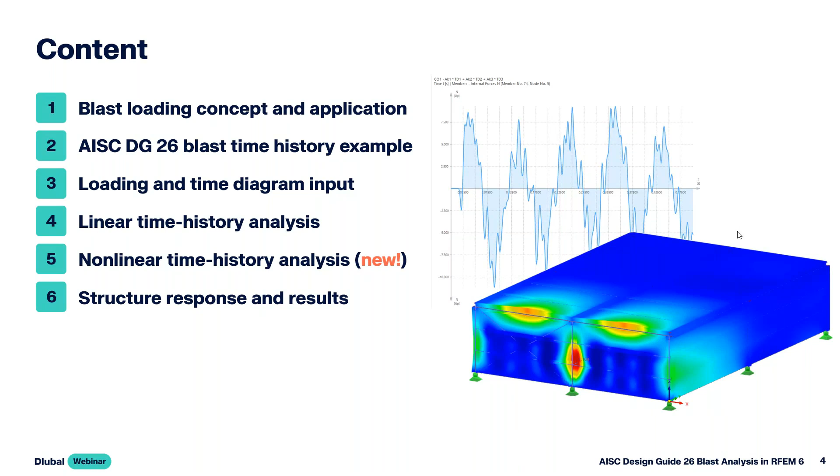So we'll turn now to the blast loading basics. The design resources that we'll be referencing today is, of course, the AISC Design Guide 26, the design of blast-resistant structures. Now, the United Facilities Criteria, UFC document 3-340-02, will also be what we reference today as one of our resources. There are many other references and literature out there for blast analysis, but for our approaches and example today, we'll be utilizing these two.

So let's talk a little bit more about factors that are going to influence the structural damage when we talk about these rare blast loadings. The structure materials, the mass, the stiffness are all certainly going to influence this. But we also want to take a look at the explosive type. How close is the distance to the structure? Obviously, if the explosion is closer, we're going to see more localized and global structural damage than if the explosion is further away. The building geometry will also play an influence.

And then the blast orientation to the structure. So elements facing the blast will see higher loads and more damage than what we see of the elements that are parallel to the blast. And finally, the surrounding structures or adjacent elements - these can also affect blast patterns. We could see load amplification or load reduction.

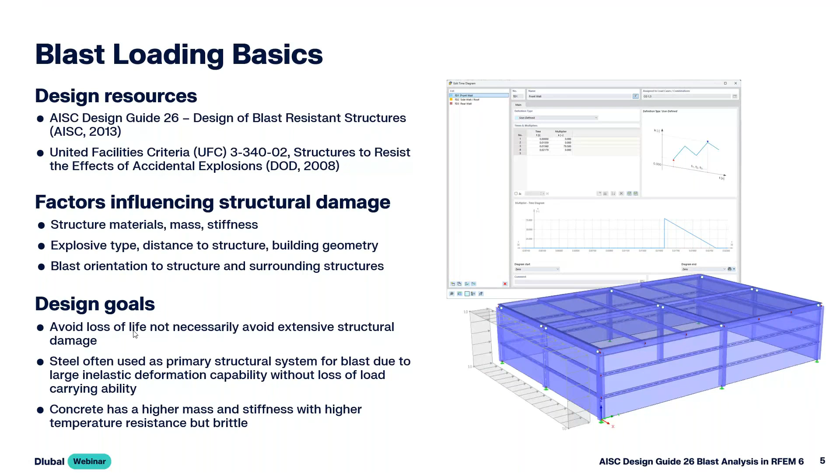So turning now to Design Guide 26 to talk about the blast load application and this idealized pressure time history for blast load.

We start off with the peak overpressure. This is the pressure above the ambient atmospheric pressure, hence the name overpressure, and it's an instantaneous pressure arriving at the structure. We have this blast load taking place at time equals 0. It takes some time for the blast wave to reach the structure, so we have our time of arrival, and then we see this instantaneous rise in pressure on the structure itself.

We then have the positive phase duration, which is the time for the pressure to return back to that ambient pressure. We also have in the positive phase duration what we call the positive impulse, the total pressure time energy applied during the positive duration, and this is simply the area under the curve.

Now, in addition to the positive phase, we also have this negative phase duration. This is the energy, the impulse, again that area under the curve that follows the positive phase, where pressure actually falls below the atmospheric pressure.

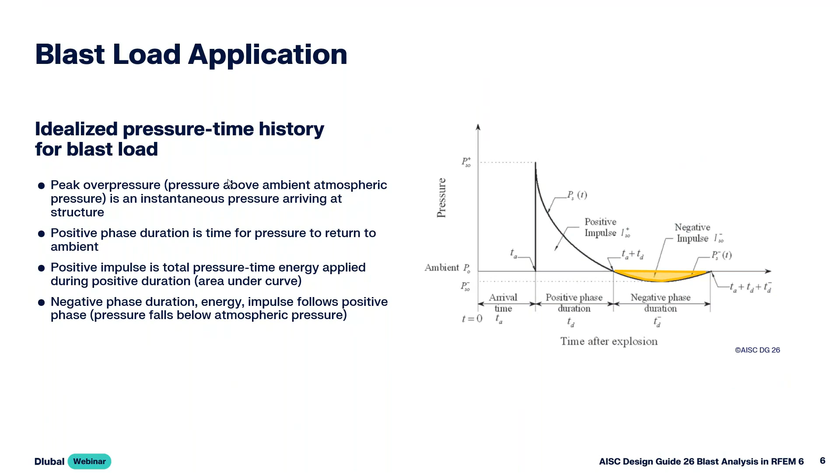We start first with the free field blast load, also known as the side-on blast load, where this blast travels parallel to a surface. It more or less sweeps over this surface with no impeding objects, so we might be talking about sidewalls, a roof, a rear wall - certainly not the surfaces oriented directly to the blast. We often see the subscript SO, for side-on, used throughout literature to represent this particular loading.

Then we have the reflected blast load, where the blast load strikes an angled surface other than parallel. We certainly might see this for a wall oriented directly normal to the face of the blast load itself. You'll notice that we have a reflected pressure, P sub R, that's significantly greater than our side-on, and this makes sense because it's closer to the blast and oriented normal to the face of it.

We calculate P sub R with the equation shown here: we take the side-on pressure, the incident pressure, and multiply by what we call the reflection coefficient, C sub R.

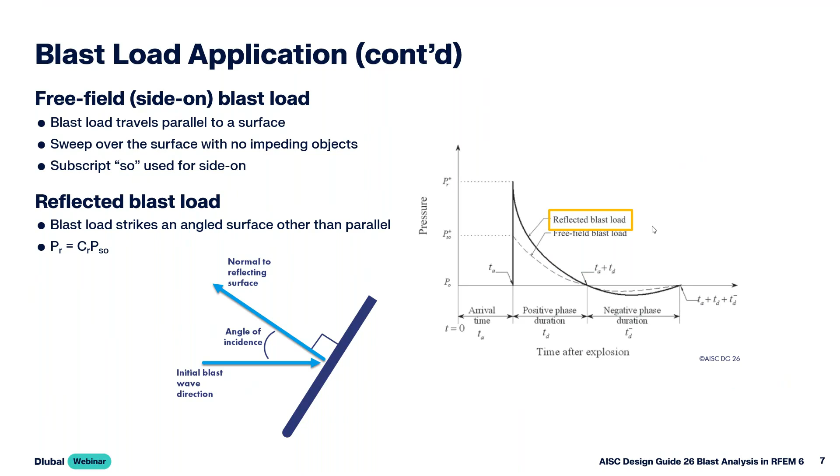Now we may be wondering, what is the angle of incidence along the x-axis? We'll refer to this small diagram on the left-hand side, where we have our initial blast wave direction, and this travels to our target element - this might be a wall element, for example. We're going to see this load reflecting normal to the face of the surface, hence why we see this 90 degrees here. The angle of incidence is then measured as this initial blast wave in comparison to this reflecting load, and this is ultimately what we use with figure 2-193.

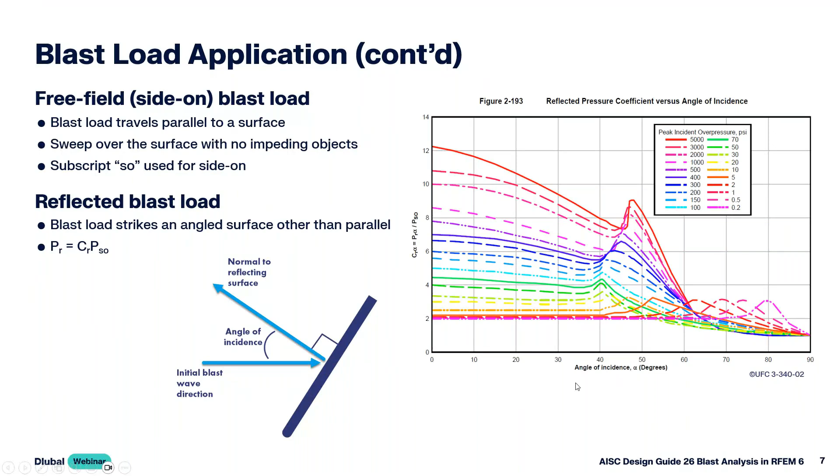Well, the equation that we use for this duration is equal to 2I over P.

Moving on to the pressure time history for the negative phase, we're actually going to neglect this for this demonstration. So a little bit simpler approach here, but we certainly don't want to always neglect this. For example, when we have elements that are weaker in the reverse loading direction, or if we have a structure with very short natural periods compared to the load duration, then we certainly don't want to neglect this negative phase. But again, for example purposes today, we will go ahead and not take this into account.

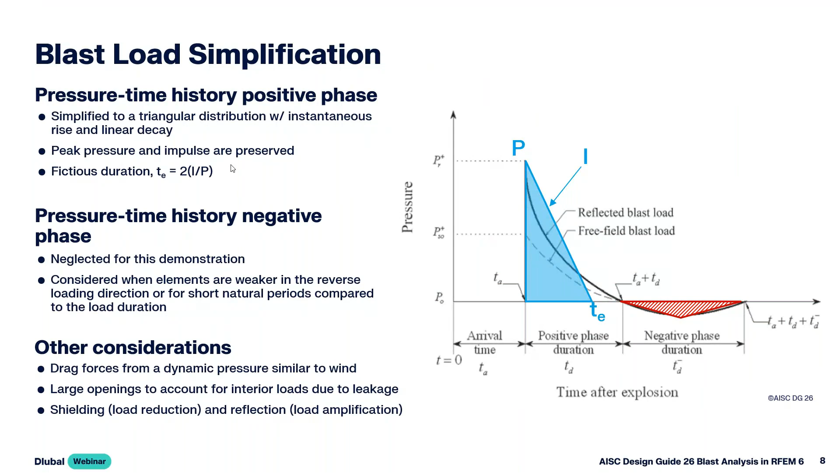So we're now going to turn to RFEM 6, and we want to begin our example today. And for those of you joining us that are not familiar with our program setup, I'll do a quick explanation here that RFEM 6 is our base program. This allows us to fully model the structure, we can load it, and we can run a full static analysis.

The response spectrum analysis will generate seismic loads according to standards like the ASCE 7, the NBC. We have the pushover analysis add-on, which is an advanced seismic analysis taking into account the structure's nonlinearities. Now, we won't be touching on either of these more seismic focused add-ons for today.

But finally, we do have the time history analysis, and this will certainly be a big part of our example once we do get into RFEM, where we can apply these forces to the structure and we can tell them how they should vary in magnitude over a set time period.

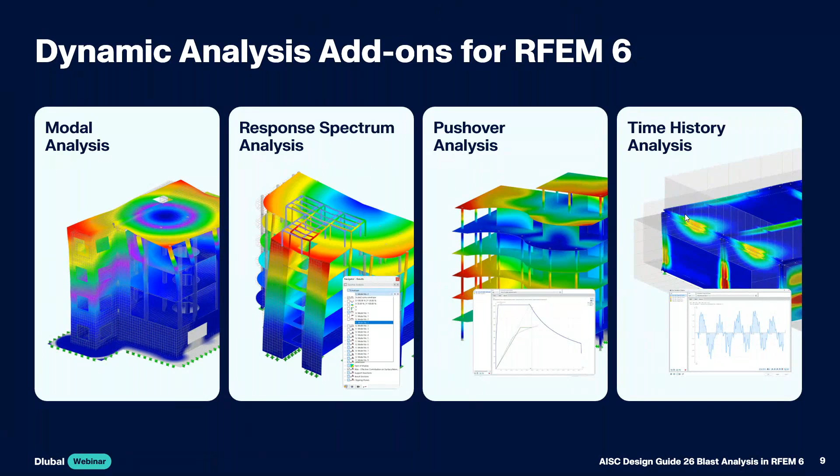Now, in the short direction, we have braced frames, and in the long direction, we have rigid or moment frames. All of the cross sections used should be hot rolled cross sections. And then for our roof deck and our wall panel, we will set these as ribbed metal decking.

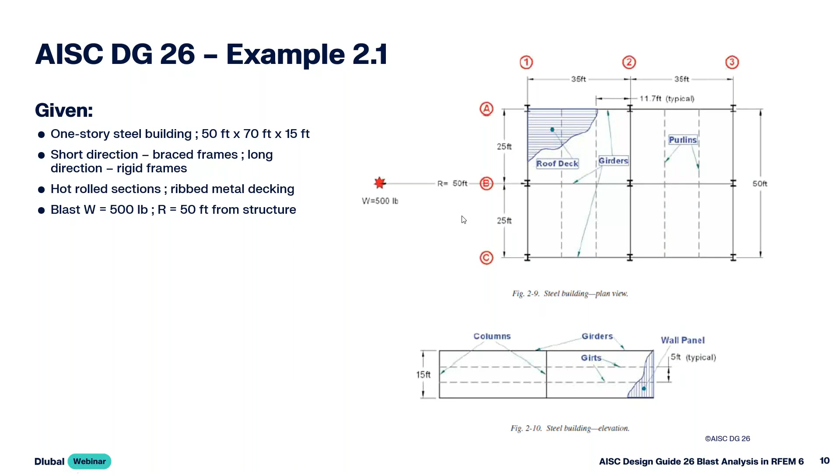Now we want to move on to our solution, and the solution is generating or calculating these time diagrams that we will eventually input into RFEM itself. And we begin with the scale distance Z. So in Design Guide 26, this states it's a simple equation here of our charge distance over the cubed root of the charge weight. We know this is 50 feet for the distance, 500 pounds for the charge weight, and we get a value of 6.3.

So we're going to now refer back to the UFC 3-340, and in particular, figure 2-15, because we need to determine all of these variables from the idealized pressure curve. And this is actually done so directly within this figure itself. Now, before we get into the actual values, there are some assumptions made with this particular plot. For example, this is assuming a hemispherical explosion, that this explosion is taking place at ground level. If you have an explosion that takes place up in the air, a spherical explosion, there are different plots that you should reference.

This also assumes that our structure is at sea level. If we have any other altitude, there are some scaling approaches we could take directly from the UFC. And finally, this plot does assume a fully reflected surface. So if we had any angle, remember a couple slides back, we'd want to refer to that reflection coefficient, angle of incidence, to maybe scale our pressures and variables accordingly.

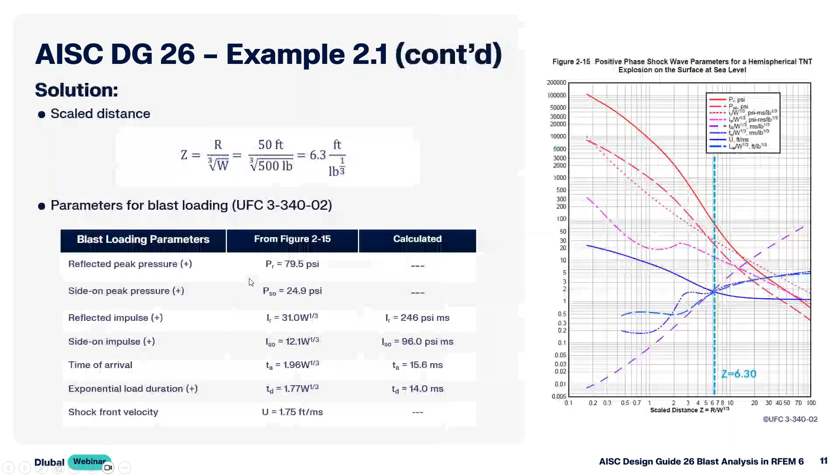So if you remember a couple slides back, we don't know what this equivalent duration is, but we have a pretty simple formula for this, and we just simply input the impulse and the pressure. This information was given to us directly in figure 2-15 that we determined here on the previous slide. So we take these values, input them in, and now we get a time duration of 6.19 milliseconds.

So we'll now move on to the side-on pressure. This is going to be the time diagram for the sidewalls and the roof. Now, for simplicity and also a little bit more of a conservative approach, I am going to use the same scale distance Z at the front wall center line as what I'm using for the sidewalls and roof. Technically, the pressures might decrease as we move along the length of these sidewalls and roof, but again, a little bit more conservative approach here.

So we have a similar triangular shape shown over on the right-hand side, but we would fully expect our pressures to be significantly lower. Our impulses will be lower as well. Again, we don't know this time duration. Well, we know P sub O and I sub O from the previous slide, figure 2-15. We input them into this equation and we are calculating here our time duration of 7.71 milliseconds.

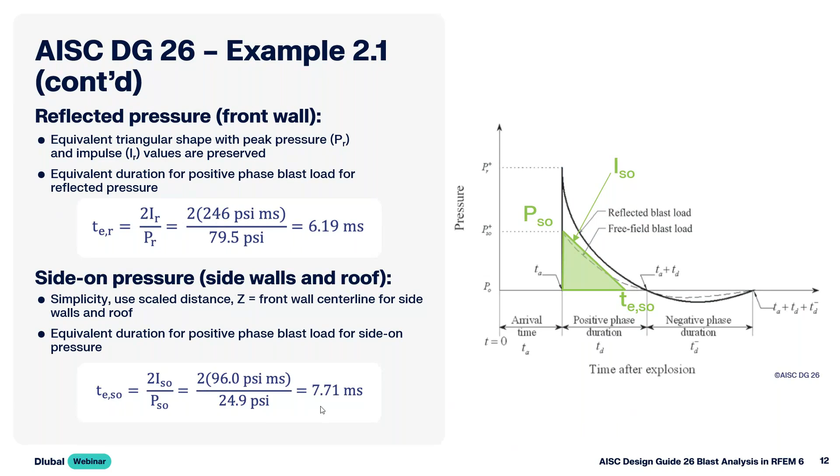And now finally, we turn to the rear wall. For this one, we do want to modify our charge distance. This rear wall will take into consideration the distance from the blast to the front face of the structure, which is 50 feet. But then we also have the length of the structure of 70 feet, so our new distance will add these two together to get 120 feet.

Modifying also our scale distance with the equation R over the cube root of W, we're going to input in the 120 feet. We still have 500 pounds, and we get a value of 15.1. So we're going to use the same UFC figure 2-15 here. We're going to plot our Z value, and we're going to get the various parameters now for our rear wall presented within this table. Again, the positive phase duration.

But you'll notice that I did not list any of the reflected pressures or the reflected impulses. That's because this back wall is not exposed normal to the face of the explosion itself, unlike something like the front wall. So therefore, we're more interested in those lower pressures, like the side-on peak pressure here and also side-on impulse. Now, again, for that triangular distribution, we don't know our time duration. We input in this information here, and we get a value of 19.1 milliseconds.

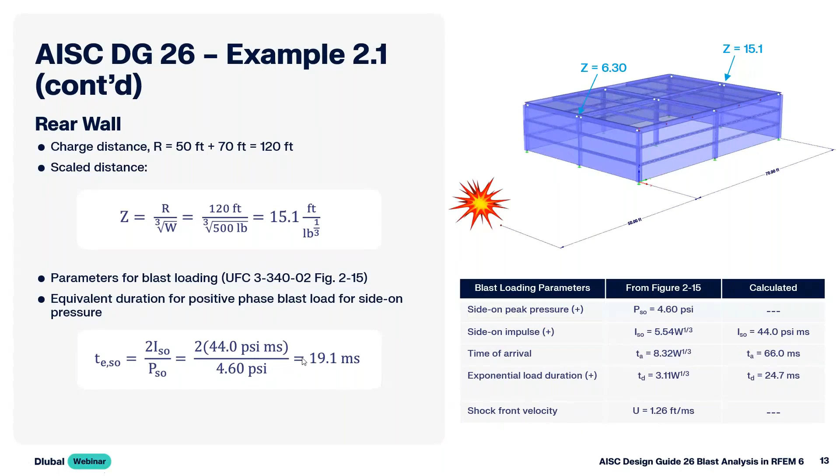Now, the rear wall is a little bit unique too, in the fact that we aren't going to have this instantaneous rise in pressure, like what we saw with the front wall or even the sidewalls and the roof. It's going to take some time for the pressure to linearly increase to the value of the peak pressure, and then we linearly decrease. So we know the time of arrival, that's equal to 66 milliseconds.

And that was just given directly from figure 2-15, as you see here on the previous slide.

We are now looking to solve for T sub 2, the time to peak pressure. We account for this given in Design Guide 26 by taking the time of arrival and adding L1 over U, where L1 is the span of the element parallel to the traveling wave—in our case, the building height of 15 feet. U is the shock front velocity, given directly in figure 2-15. We input these values and get a time duration of 77.9 milliseconds.

So now we know T sub A and T sub 2. The final time we need to determine is T sub F. This is a simple equation: we take T sub 2 solved for above and add the equivalent duration solved for on the previous slide, taking into consideration the impulse and pressure. We take 19.1 milliseconds, add it to 77.9, and get our final time point of 97 milliseconds.

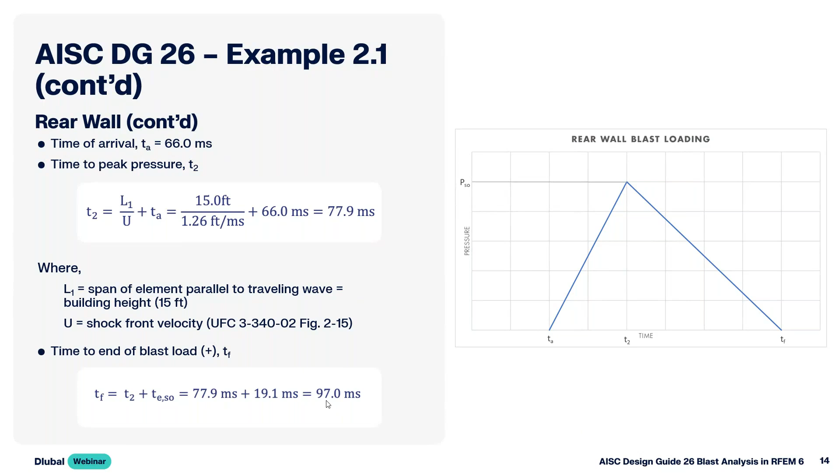Let's summarize a few assumptions for this analysis. Remember, we're using this equivalent triangular loading function, much simplified. There are more exact loading functions out there—for example, the Friedlander equation, if we wanted to more accurately represent the blast wave shape. Also, the negative phase of the shock was neglected for this example, along with other variables we listed: dynamic pressures with drag forces, large openings—these are not included in this example.

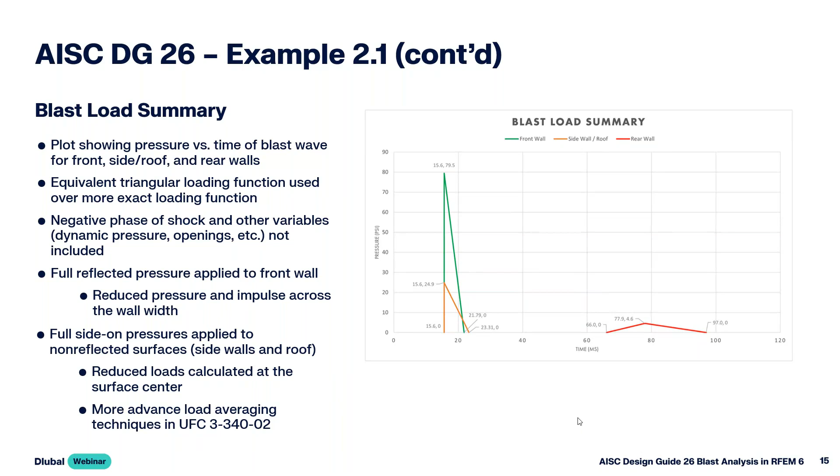Okay, so we are going to turn now to RFEM directly. I'll go ahead and launch the program here. For the sake of time, I have already modeled our structure from the Design Guide example given, so we'll do a quick model review.

There were some assumptions made, for example with the cross sections. We have W14 by 193 defined for our columns, A992 material. Our girders are defined as 18 by 130. We have our purlins here, channel sections, 10 by 25, A36 material, and our girts, which are 10 by 30, also A36.

Now, because we have braced frames in our short direction, I added in some X bracing. These are just going to be round circular sections, such as a rod, for example. But you'll notice that the member type here is unique.

All the rest of our members in this example are set to a standard beam, a standard column. But for my X braces, I have set this to a tension-only member. This means it should only take tension forces. If compression is introduced into this member, it is deactivated within the static analysis, and if tension is reintroduced, it will be reactivated due to the nonlinear capabilities within RFEM. So just something to keep in mind there.

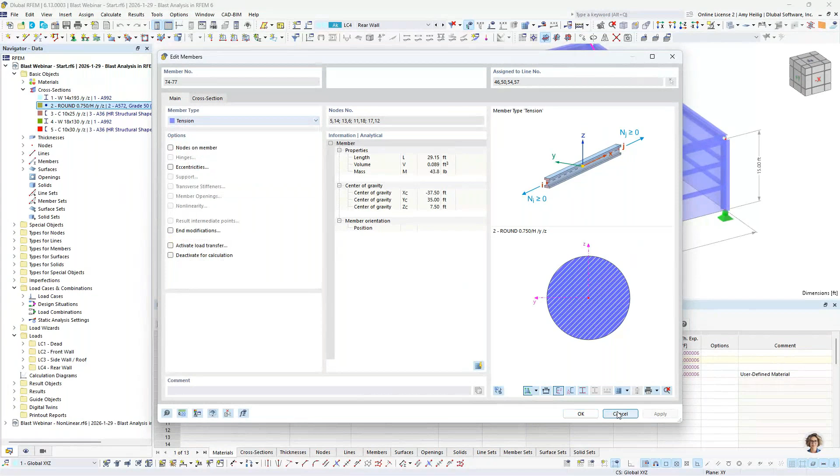Now, as far as our surfaces, all the surfaces are defined here. So we'll take a quick look at the front surface, for example. All have the material A653 applied to them and a set thickness. Now, this thickness is a bit unique as well. So if we take a look at the thickness type, normally we would set this to a uniform thickness, which is just any type of standard surface.

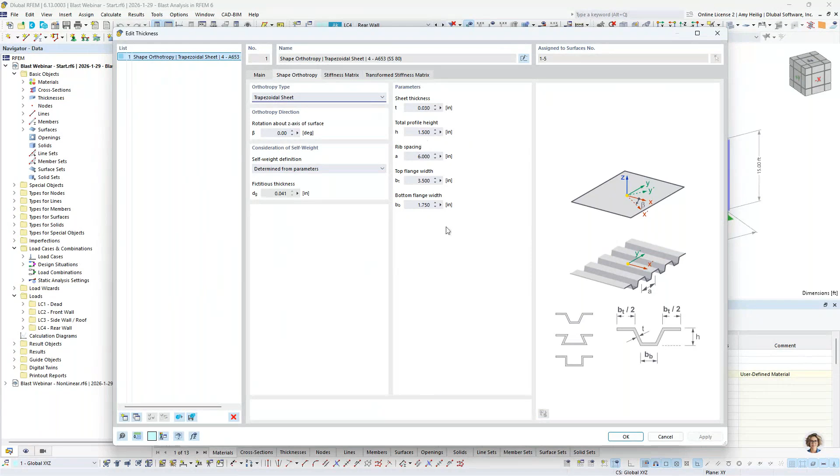But I did set this to an orthotropic stiffness instead. And with this orthotropic entry, we now get this second tab here where I can directly select something like a trapezoidal sheet, and I can input the sheet thickness, some geometric properties like the total profile height, the rib spacing, and so on. The program is going to take all of this information and directly calculate the stiffness matrix based on these orthotropic stiffness properties. So this is all done automatically, and you have a nice view here of the stiffness matrix directly.

Okay, so the final thing just to note is, of course, the dimensions. We talked about 50 feet in the short direction, 70 feet in the long direction, 15 feet in height. And our blast analysis is going to be taking place about 50 feet away from the front face of this wall here. Now, we also want to cover our loading.

So I will launch our load cases and combinations dialog box. And under the base data, I have set here the ASCE 7, the latest 2022 standard. Now, this really doesn't play too much of an impact in our example today because I'm not generating my load combinations automatically. You can see this is turned off here.

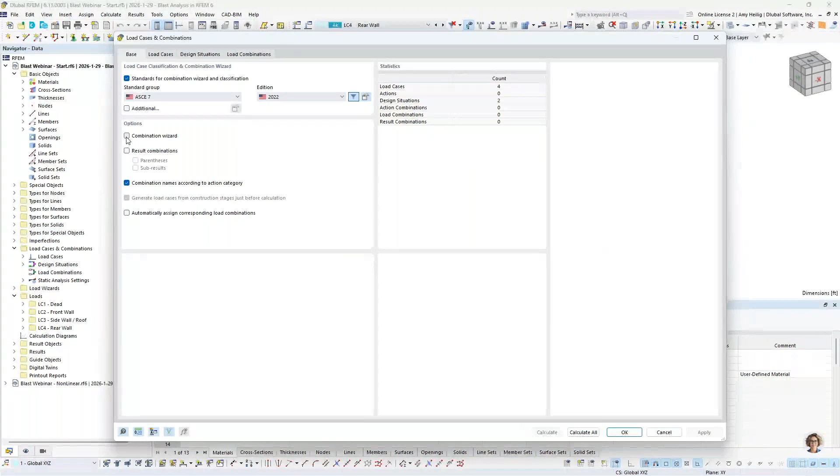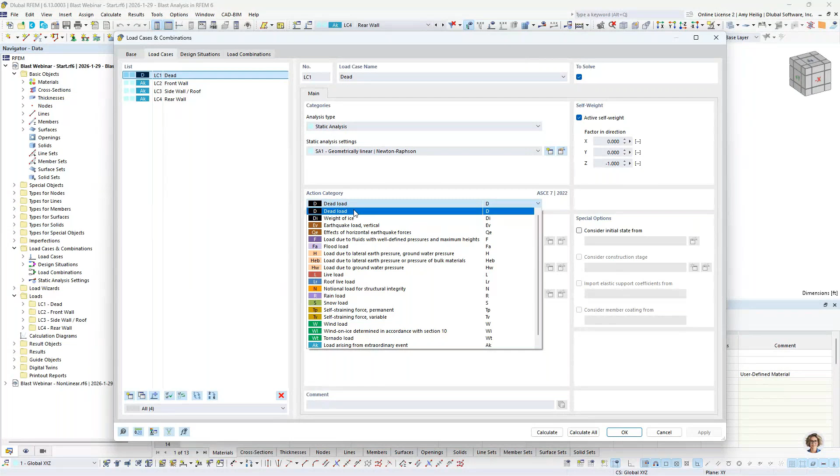Now, under the second tab, these are the various load cases that I've defined. And we start first with our dead load case. So we have self-weight activated within this load case, and I did assign the action category here based on the ASCE 7 to dead load. Now, again, this isn't so important. If we were combining into the load combinations automatically, the program would need to know this in order to know what load factors are defined. But just for a nice categorization, we'll go ahead and apply this to the correct action category.

I have 3 additional load cases here, including the front wall and the sidewall and roof, as well as the rear wall. So this is going to represent these loads from the blast being applied to the structure. The action category here is set to the load arising from extraordinary event.

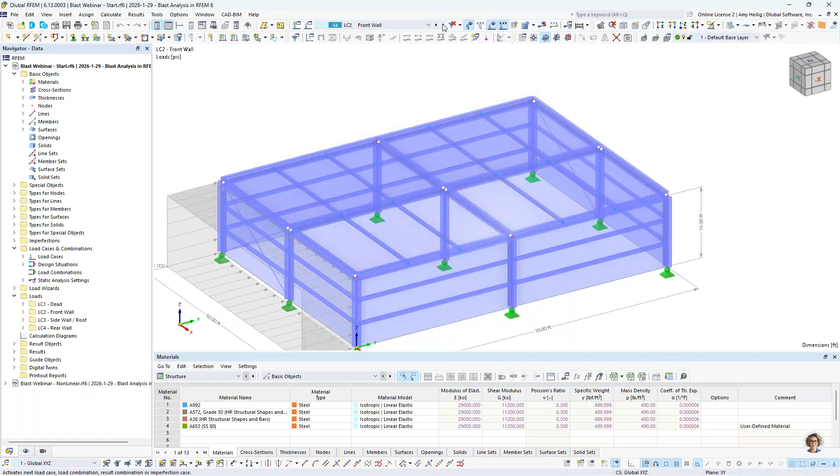So now that we have our load cases defined, we need to actually apply the loads to the structure. And we begin with first our dead load. So remember, self-weight is considered here, but also I have applied an additional member load to my main girders up at the top of 0.1 kips per foot, just to account for any additional dead load within the structure. I then have that first load case here for my front wall. So you can see that this is a uniform load applied to this front face of this surface.

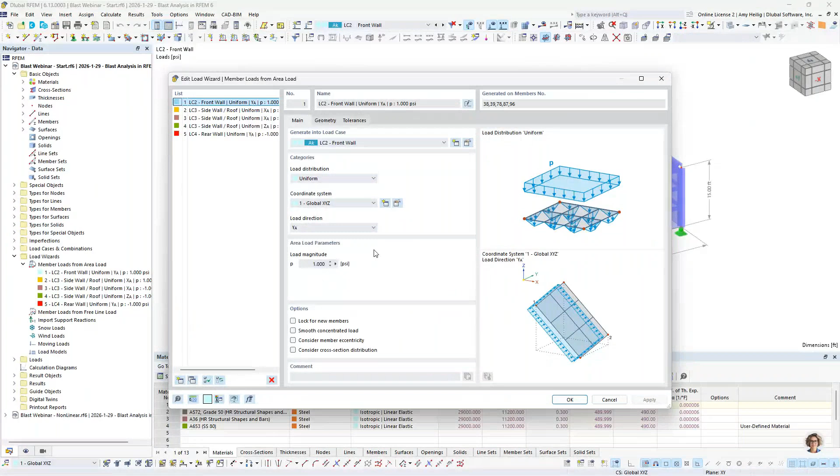Now, this load is a bit special in the sense that I did take advantage here of our load wizards over in the navigator, where I can apply these as member loads by specifying an area load. So if I double click on this load, we go into the load wizard dialog box. I have applied the load in the global Y direction towards that front face of the structure, and I gave it a load magnitude of 1 psi. This is just a simple unit load. So we're going to later on define the time diagram where this load is going to vary in magnitude. So we don't want to do it here with this applied load. This is why it's just a simple 1 psi.

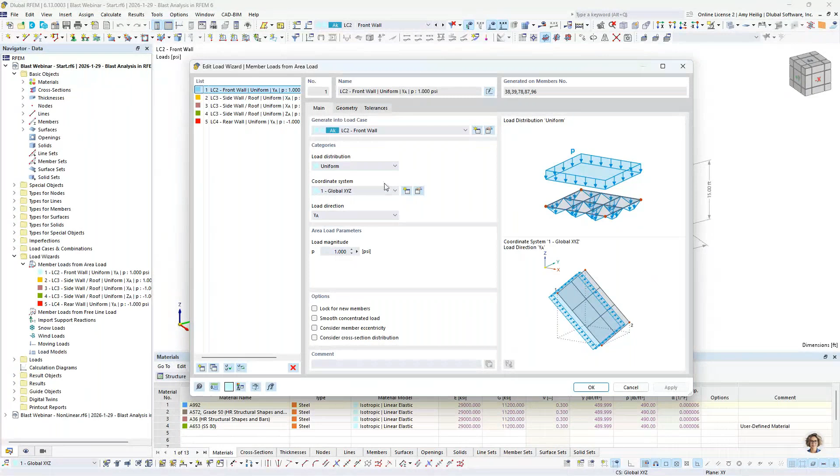Now, if any of your units are incorrect, you can always access down here the units and decimal places and make adjustments to that. So we also have the ability here to select the 4 points for this area load, and we can also neglect members. For example, I didn't want to consider the load being applied to my girts.

So once this is done, you'll see we get a nice view here of the tributary area of the members that this load will be applied to. We can take this a step further by right-clicking and displaying separately to see the load actually applied to the structure itself and the particular members that I have selected.

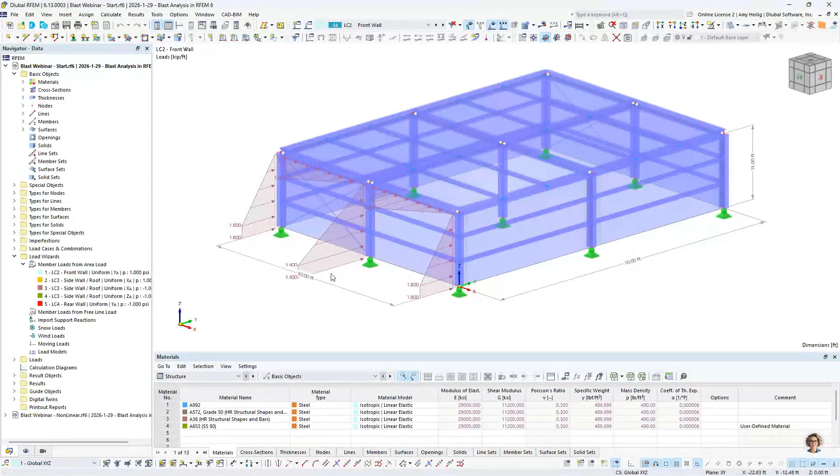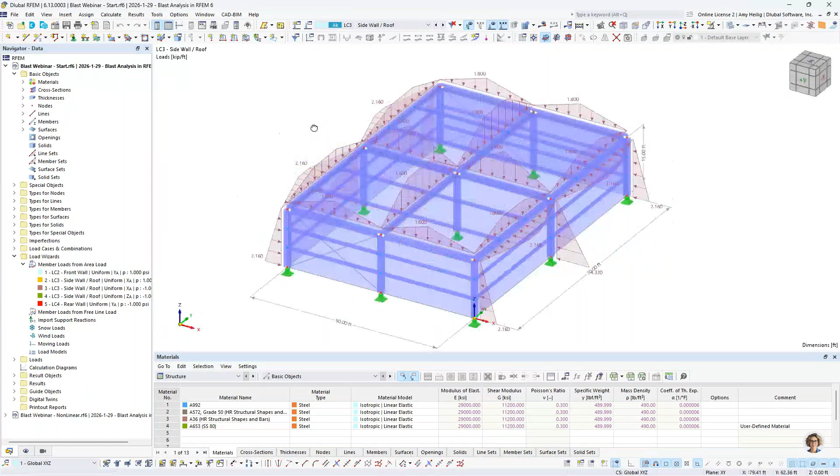So we can right-click to turn this back to a uniform load display, and take a look at our second load case for the blast load. Very similar concept here, but this time it's applied as the sidewalls and the roof. We can right-click to display separately, and again we see those loads distributed to the main members, neglecting the girts and the purlins. Finally, we have our last load case for our rear wall, so same concept there.

So now that we have these loads defined on the structure, we're ready to move forward with our dynamic analysis. For this, we need to activate our base data dialog box. This can be found by right-clicking on the model name here in our navigator, or it can be accessed through our quick tools up here in the top.

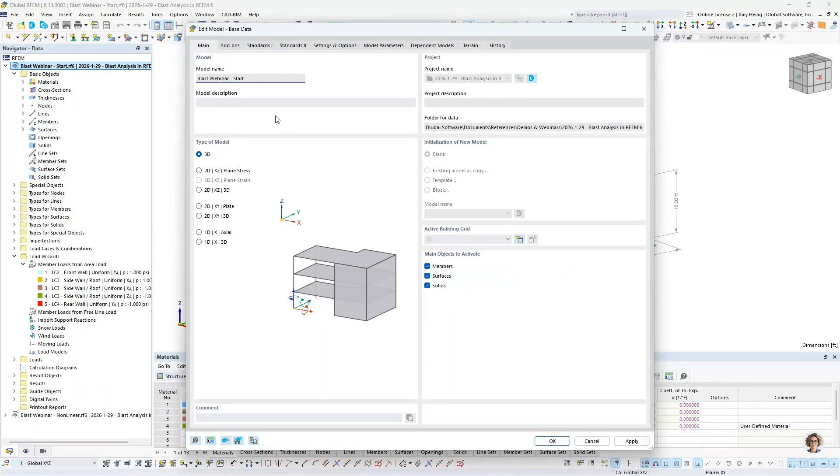This is essentially the dialog box that will pop up when we create a new RFEM model. Under this second tab, these are the various add-ons that we can activate within our RFEM model itself. For today, I am going to move forward with both the modal analysis and the time history analysis.

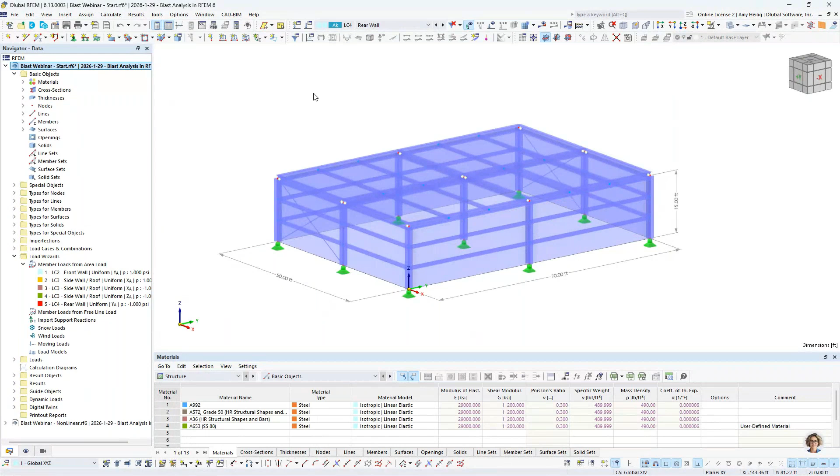So when we activate those add-ons and come back into RFEM, you can see it really doesn't look too much different. So what we want to do is go into the load cases and combinations dialog box, and I'm going to create a new load case here. This is going to be for my modal analysis.

Now the analysis type here is going to be toggled down to modal analysis. This is available to me because I've activated that particular add-on. We then want to adjust the modal analysis settings. For this, I'm going to calculate a total of 40 eigenmodes. I want to make sure that I get enough mass participation, that I understand what's going on with our structure. We'll go ahead and leave this as the Lanczos solver.

I'm going to modify the mass matrix to diagonal. Now, remember that this blast load is traveling from the front of our structure to the rear in the global Y axis. We can't see that because of this dialog box, but that's what's happening for the overall analysis. So just for a quick calculation, to really hone in on what's going on in the Y translation direction only, I'm going to deactivate the additional degrees of freedom here for my mass matrix.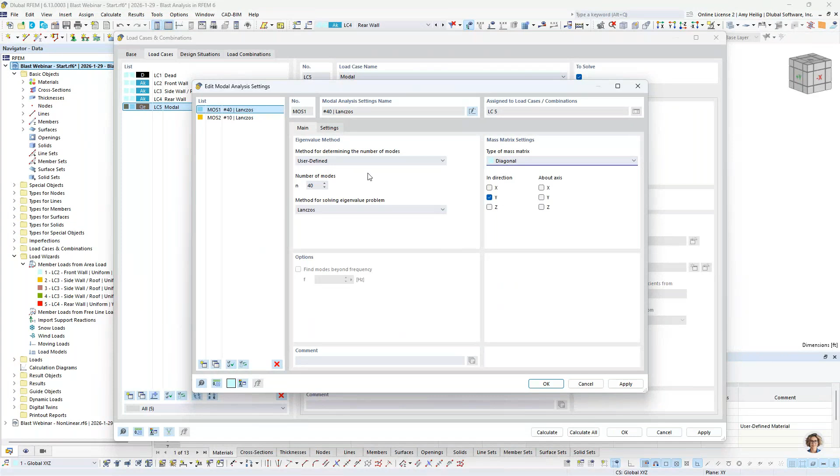Now, for any further information on the different mass matrix types or solver types, you can always click on this info button in the lower left-hand corner of these dialog boxes. This will take you directly to our online manual and this particular dialog box to explain these options further. Now, the additional settings here can all be left as default, so I can click OK.

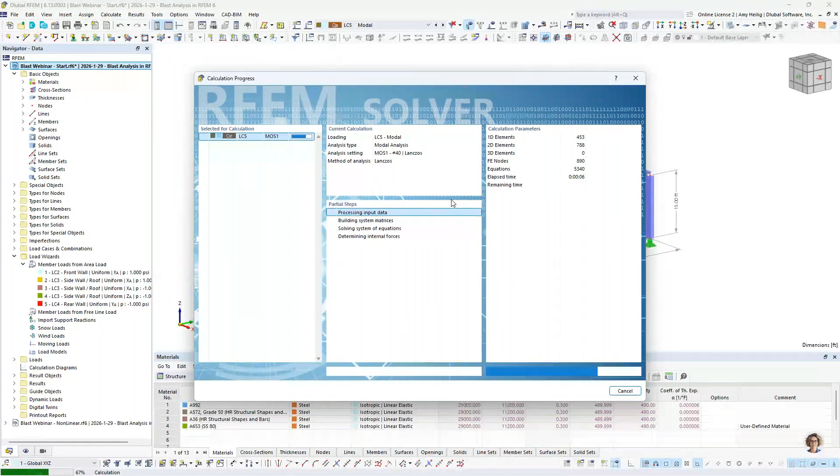We are going to import in the masses from our dead load case. We also have the ability, if we wanted to create a mass combination, we could do so. Essentially we'll get a pretty quick analysis here. Again, the program is going to determine those 40 different eigenmodes, and we are presented with our analysis results.

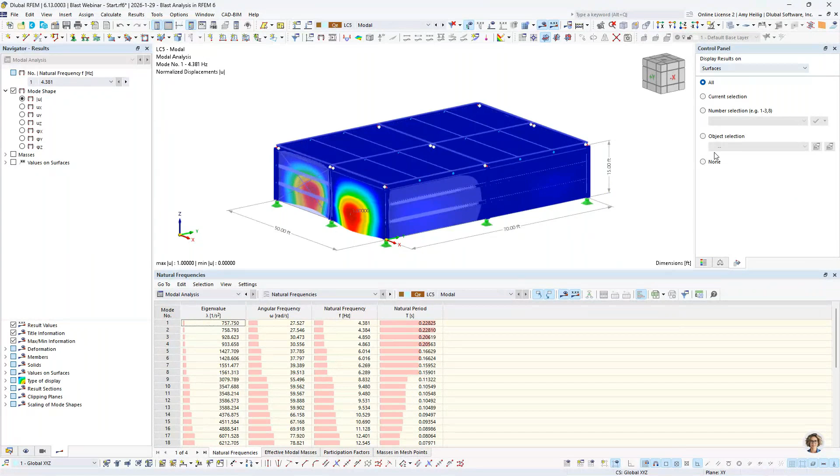So you see here that we have our modal analysis results presented to us in table format, and we now have a new tab over here in our navigator with the results shown as well. Because these loads are being applied to the members themselves, I'm not so interested in what's going on here with the surfaces. So I can always deactivate the surfaces from the display of my results by toggling this to none, and take a look at the members themselves, in particular the second tab within the table.

We want to determine here what are our dominant mode shapes. Remember, we're only looking in the Y direction. As I scroll down through this table, I see mode number 9. This certainly has the most mass participation, so this will be one of our dominant modes. I want to note here that the natural frequency is updated over on the left. So we'd want to write this number down, 8.832 hertz, because we're going to utilize this later on for damping purposes.

And then we continue scrolling down to maybe find our second dominant mode, and that's going to be mode shape number 27, with a frequency of 15.963. So we'll go ahead and write that one down as well.

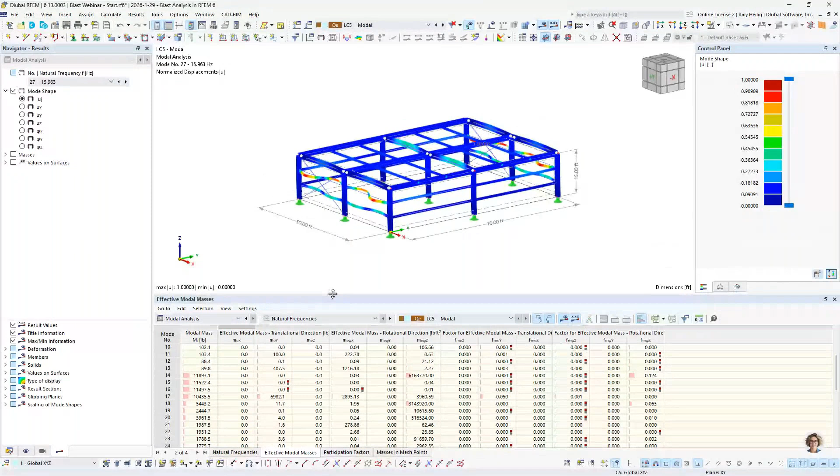So now that we have this information, it will make a little bit more sense as we move forward. You can also view under the first tab if you're interested in mode shape number 9, where we can see the angular frequency, natural frequency, and natural period. We're probably also interested in mode shape number 27. Keep those natural frequencies in mind, we'll return to them when inputting the damping for the time history analysis.

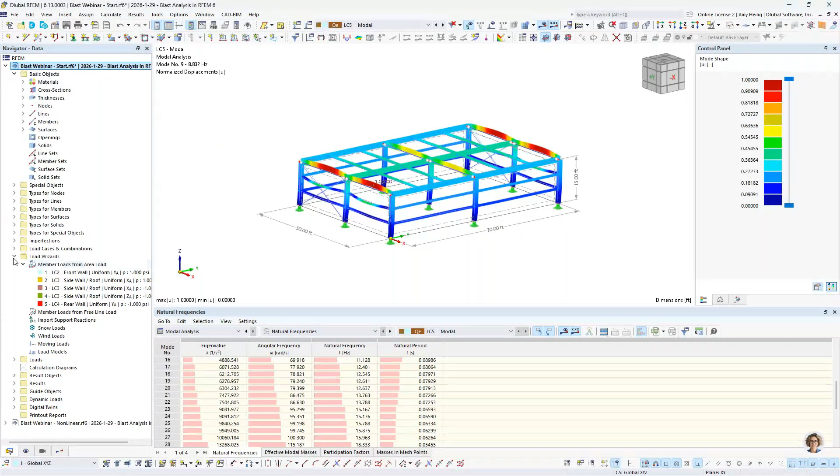Now that we have completed a quick modal analysis, let's move on to the time history. In our navigator on the left, there's a new folder called Dynamic Loads, because I've activated the time history analysis add-on where I can directly define my time diagram. So I double click to create my first definition here.

Within my time diagram, this is where we begin inputting the information we determined from those slides and from Design Guide 26. We'll start by giving this a new name, and we'll call this one Front Wall. As far as our time diagram input, we have two options: we can set this to user defined, where we input table values directly, and that's what we'll be using today.

Alternatively, if you had a function, like the Friedlander equation to represent that idealized pressure curve in more detail, you can input that function directly in RFEM as well. For our front wall, taking advantage of the user defined option, let's go back to the PowerPoint because I want to focus on this time diagram for the front wall only.

If you remember, we have already determined all of these points from our previous calculations. We have our instantaneous rise in pressure to 79.5 psi, and then this linear decay back to 0. We have already determined the time values at each of these points, and these are the points we'll directly input into RFEM for our first time diagram.

So we go back to the program, and our first point is going to be at time 0 with a multiplier of 0. Remember, we're going to apply this time diagram to that unit load back in that particular load case I showed you earlier, to tell the program how to vary the load magnitude over a set time. Our second point is going to be...

0.01559, with the multiplier still set to 0. But now, under the third input option, we type in a time of 0.0156 with a multiplier of 79.5. Finally, our fourth point will be 0.02179 with a value of 0.

You can see that our time diagram shown here in RFEM exactly replicates what we just saw in the PowerPoint example. Now you'll notice I don't have the ability to set the same time for step 2 and step 3 to 0.0156 — the program will give you an error. So I had to offset this instantaneous rise in pressure just slightly with the multiplier of 0.

It's the exact same shape as our front wall, with this instantaneous rise in pressure, but the peak pressure here is significantly lower because it's not oriented directly towards the blast itself. Then we have a linear decay back to 0, and we know all of these times as we've solved for them. This is the information we want to put directly into RFEM for our second time diagram. The first 3 time inputs are actually all the same, but we do want to modify our multiplier, which is going to be the peak side-on pressure, to 24.9 psi.

And then our linear decay back to 0 is also slightly adjusted from our front wall, and this will be 0.02331. So with the program plotting these various points, we now see our time diagram that reflects our PowerPoint slide that we were just taking a look at. So we then have our final time diagram.

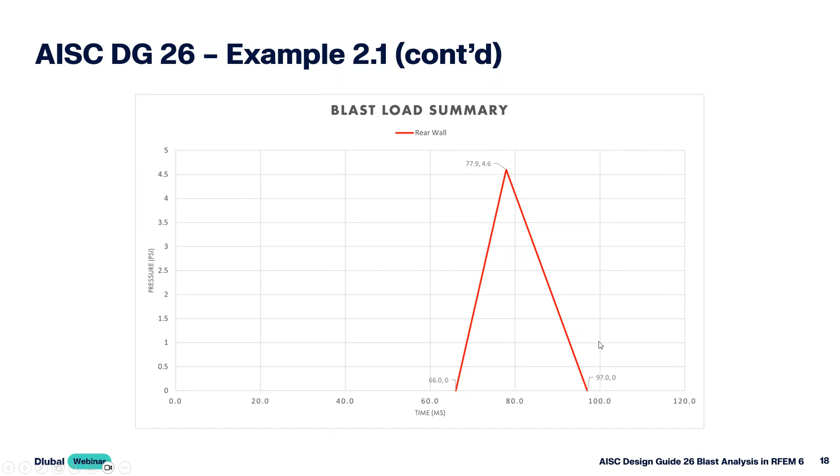For this one, I'm going to create a new definition here, and this will be for the rear wall. We'll go back to our PowerPoint one final time to look at the time diagram we've determined for the rear wall. Now remember, this one looks a little different because it does take some time for that blast wave to reach the structure, but we have a linear rise to that peak pressure, and then it decays linearly back to 0. We know all of these points, so this is directly what we will input for our third time diagram.

The time 0 with a multiplier of 0, and then our second point will be 0.066, with a multiplier of 0 as well. Our third point will be 0.0779, with a multiplier of 4.6. And our final point is going to be 0.097, with a multiplier of 0. So we see that relevant time diagram shown here that replicates what we just saw in the PowerPoint.

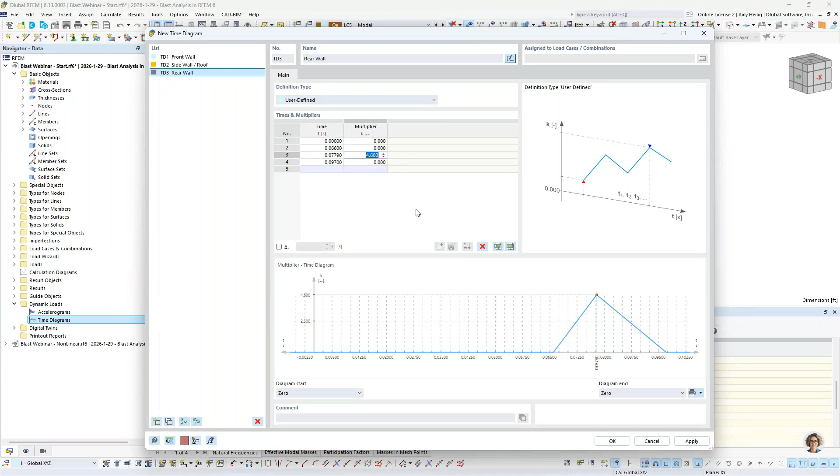Now that we've created these time diagrams, we need to correlate them with the unit loads that we applied to our structure under the load cases. We'll click OK through this dialog box and go into our load cases and combinations. I could run a time history analysis for these individual load cases, as you see in this dropdown, but that's not the intent of this example. The structure isn't going to experience the front wall blast initially, then the side wall and roof separately from the front wall and rear wall. All of this is happening at one time, but the magnitudes vary over that duration.

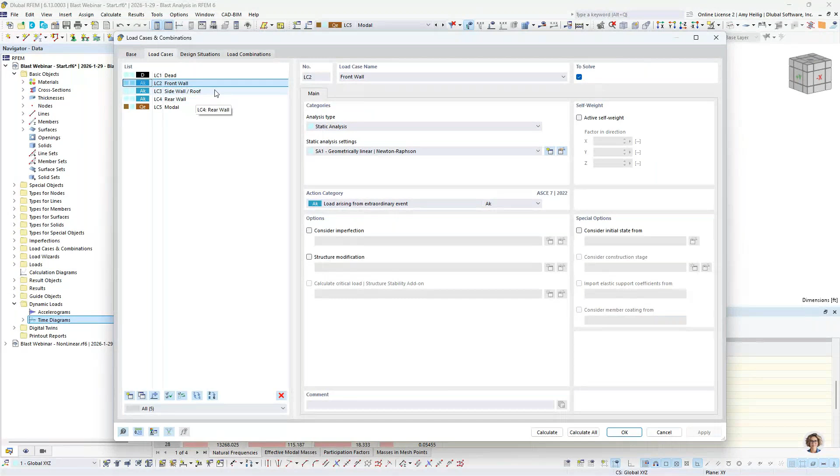The only way to combine all of these into a single time history analysis is under our load combinations tab. So we create a new load combination definition, and the analysis type is set to time diagram. Now we have our time history analysis settings to go through in more detail. Within the dropdown, we have two linear solvers, including the linear modal, which is a decoupled system based on the model's eigenvalues and mode shapes.

A modal analysis with this solver is incredibly important—we want to make sure we have an accurate modal analysis. For our example today, we're going to use the linear implicit Newmark solver instead, which is a direct time integration method. It requires sufficiently small time steps, but a big difference is that we don't need that modal analysis whatsoever. The modal analysis we carried out earlier in this example technically isn't needed. I am going to use it for damping purposes, which will make more sense in a few minutes, but the modal analysis isn't necessarily needed for this solver.

With both of these linear solvers, keep in mind that any nonlinearities are automatically converted to linear elements underneath the hood for this dynamic analysis. So if we had a nodal support that fails in uplift but in downward compression fully re-engages, underneath the hood for the dynamic analysis it will just be converted to a linear nodal support. For our example today, we have a tension-only member, but for a linear solver underneath the hood, it's converted to a truss element, so it will take both tension and compression forces—this is simply a limitation of these linear solvers.

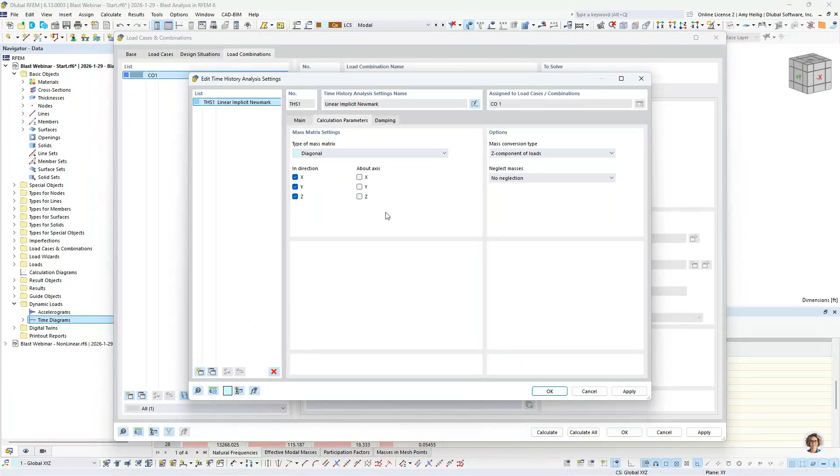For the calculation parameters, I'll modify the mass matrix to diagonal, though there's not much difference between consistent versus diagonal here. I'm going to uncheck the degrees of freedom for rotation about the global axes, but leave translation activated for this mass matrix.

And finally, we have our damping. When we talk about the Newmark solver and damping, we always refer to the Rayleigh damping parameters, alpha and beta, where alpha is the mass portion of that damping matrix, and beta is the stiffness portion of that damping matrix. We want to ensure these parameters are input correctly.

Most of us might be used to Lehr's damping, where we just input a set percentage for the damping. We have a nice tool here where we can convert from Lehr's damping to Rayleigh damping by inputting the natural frequencies of our two most dominant mode shapes. This is why we carried out that modal analysis to determine the two dominant mode shapes. Remember, we wrote down the relevant frequencies from mode shape number 9 as 8.832 hertz, and from our second dominant mode shape, mode number 27, as 15.963 hertz. The Lehr's damping is 2% for this structure, so I can input this information directly, and alpha and beta are directly calculated for me. Nice feature for the damping considerations.

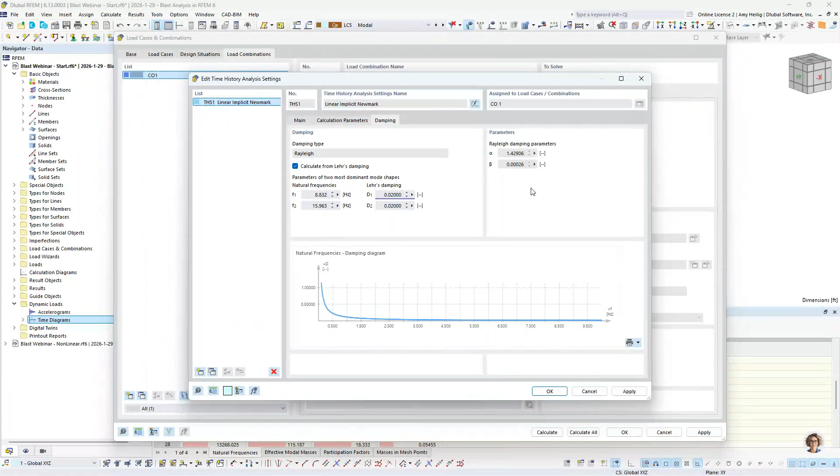Once all this information is input, we're going to import the masses from the dead load case once again. Under the assignment, this is where we move our 3 different load cases over to the right-hand side by double-clicking on them and relate them to the relevant time diagrams. We have our front wall related to time diagram number 1, our sidewalls and roof related to time diagram number 2, and finally the rear wall related to time diagram number 3.

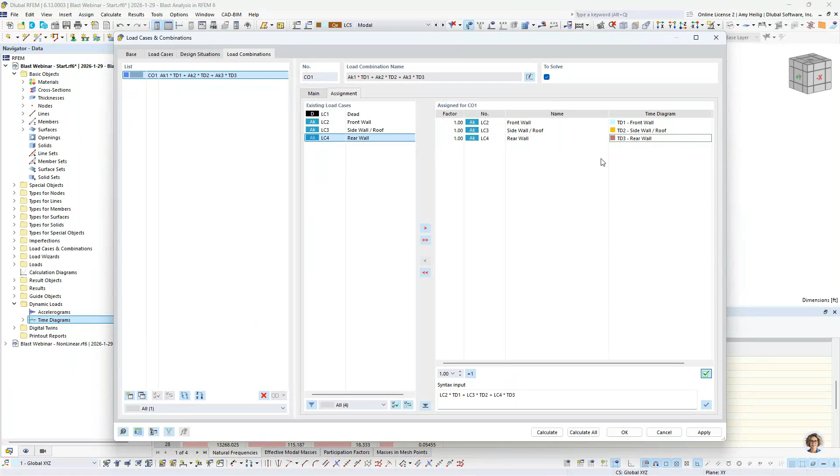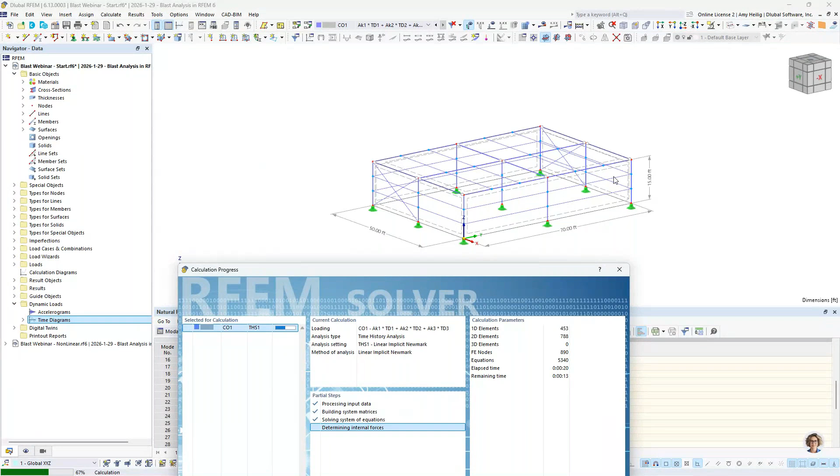I'm going to begin this calculation here. For this linear solver and the time steps I've set, we'll see this solve pretty quickly. So what's happening in the background? We're now applying each one of those unit loads - remember, the area load at the front face, sidewalls, roof, and rear wall of the structure. But now we're applying those 3 separate time diagrams to tell the program how the load magnitude of this blast wave should vary over the total time duration of 0.5 seconds.

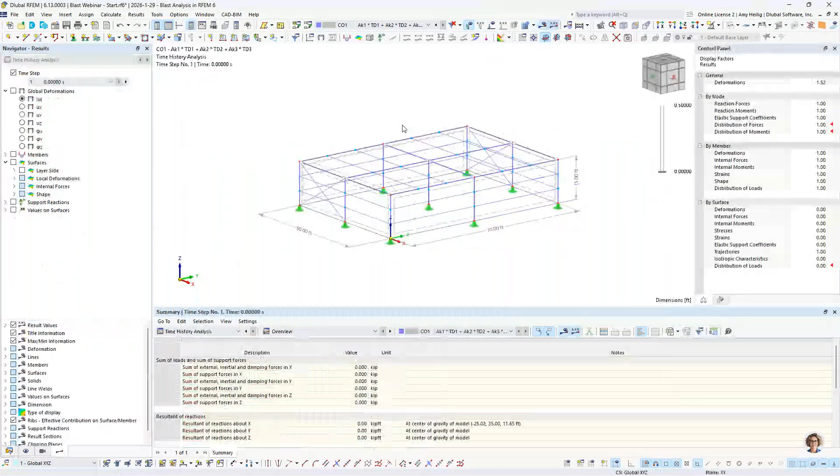Once this calculation is done, we'll see our results here within the navigator on the left, but I'll also go ahead and activate my surfaces within table format. As we take a look at the save time steps here within our dropdown, we cycle through these and see, not much is happening.

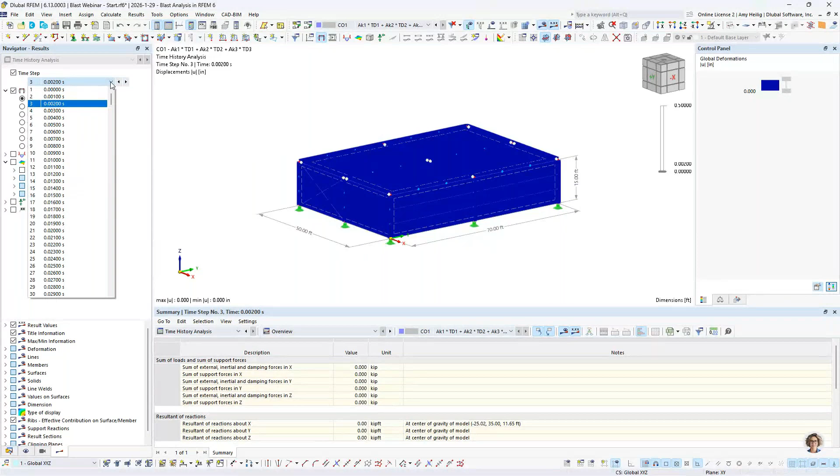It's going to take a small time period before this blast wave actually reaches this structure, and that happens at 0.016 seconds. This is where we start to see deformations on the structure. So we can cycle through these time steps to see the deformation graphically change as that wave load moves from the front of the structure to the rear.

Now, the time history analysis results are also available here in table format. For example, if we're interested in the internal forces of our members as an envelope solution for this time history analysis, we can export this information to Microsoft Excel with the click of a button for further sorting. This could certainly be beneficial to review as well.

One other nice feature you may not be aware of is up here in our tools, we have what's called the calculation diagram monitor. I can activate this and you'll notice it populates down here, and maybe I temporarily close out my table. This has a drop down that includes all of the result information from this time history analysis.

So if I want to take a look at my acceleration of a particular nodal point, I select that here. I could graphically select maybe a node at the front of the structure, and maybe I'm interested in the accelerations in the Y direction. So we see that plotted here within the diagram monitor over the 0.5 second duration.

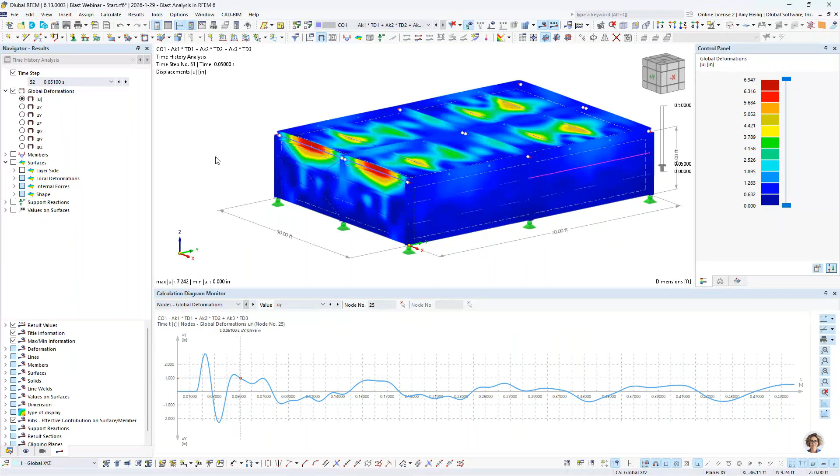The final thing we'll touch on is under the navigator for this linear analysis is the calculation diagrams. This is actually very similar to the calculation diagram monitor. The benefit though is that we can create as many calculation diagrams as we want, and this will actually be saved to the model.

So we can begin with first a time history analysis with our analysis type. The program says, okay, I need to toggle this to my load combination then, because that's the only time history analysis I carried out. We have our time on the x-axis, and on the y-axis we have that exact same information that we previously saw with our diagram monitor.

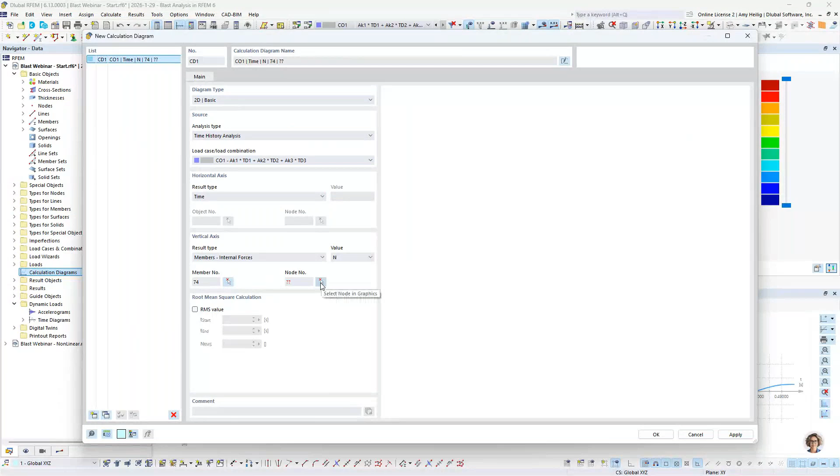Perhaps we want to take a look at the member internal forces. I'm going to select the axial forces and graphically select my tension-only member, member number 74. I also need to choose a node along that member in order to plot out the internal forces at that particular location. What you'll notice is that this tension-only member certainly has tension forces in the positive region of this diagram, but because we're utilizing that linear solver, it is converted to a truss element underneath the hood for this dynamic analysis. So now we're seeing a lot of compression forces within this member as well.

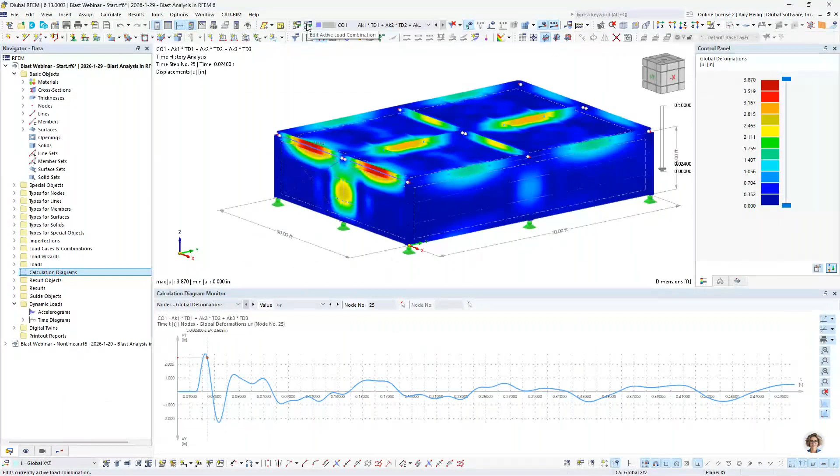So we'll kind of wrap up here the linear analysis. Now, because we have these nonlinear elements, maybe we want to turn to a nonlinear time history analysis. I'll go ahead and click OK in this diagram, and we will revisit our load combinations dialog box.

This is quite easy, as I'm going to make an exact copy of my existing load combination number 1. You can see it copied here, but I'm going to go into the time history analysis settings and make a copy of my existing settings. And I'm going to select here the nonlinear implicit Newmark solver.

As mentioned, this was released relatively just a few months ago, and this is a phased release, so not all nonlinearities are accounted for right now. For example, we put a lot of effort and testing into member nonlinearities, nonlinear nodal supports, nonlinear member end hinges, but something like a nonlinear material is not quite ready. The program will give you a warning if there's something that's maybe not supported yet or untested, just so you're very aware of what's available with this particular solver.

But with our tension-only member today, this should certainly be considered with the nonlinear implicit Newmark solver. Now it's important that we decrease our time steps even further.

So I'm going to add an extra 0 here for my save time step, 0.0001. I'm not going to split the save time steps any further for this particular nonlinear calculation. Again, we'd probably want to carry out a time step study.

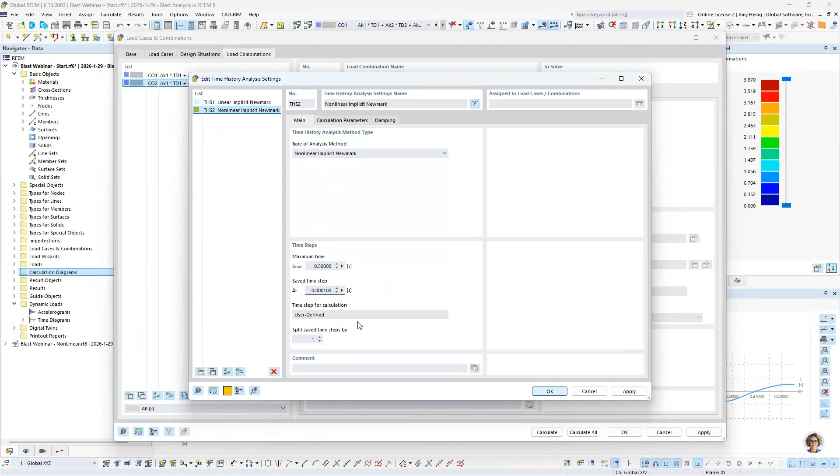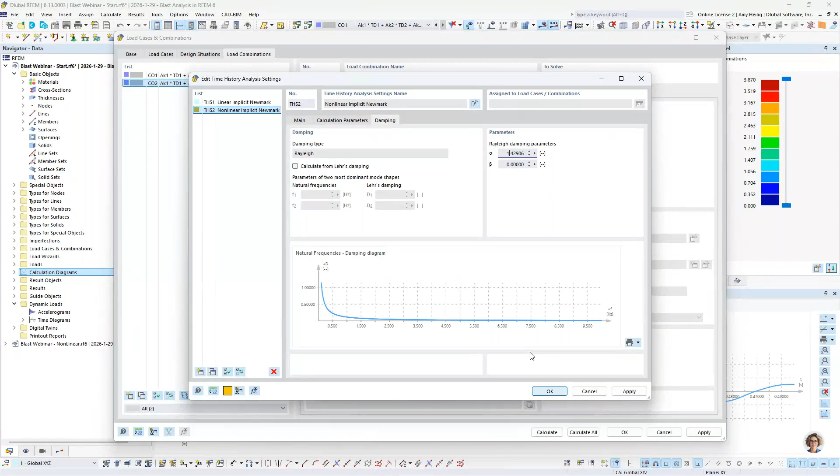For the damping, it's important to know that in the current state for this nonlinear Newmark solver, we cannot consider the beta damping parameter, so it would be best to set this to 0. Alpha is still considered, and we will continue to improve on that in the future. But we do need to get convergence for this calculation, and we can only do so by setting beta equal to 0.

So once this information is set, we're ready to run the calculation by selecting these new analysis settings that we just defined for the second load combination. Everything else is the same under the assignment tab, and those load cases are associated with the relevant time diagrams.

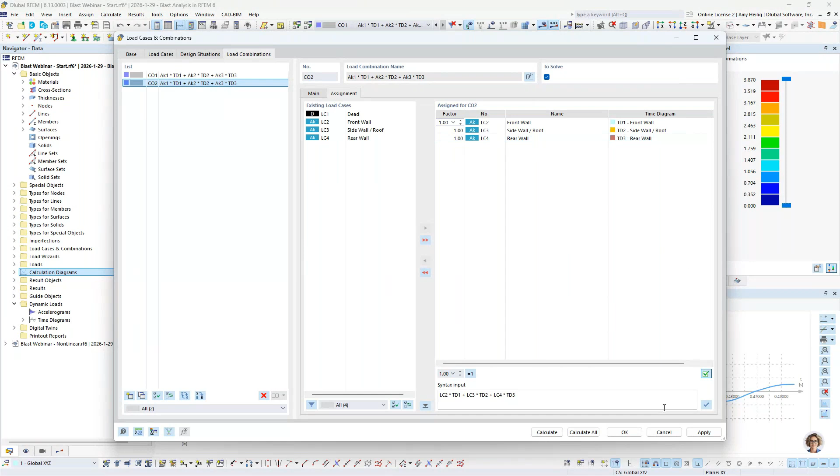Now I have an already saved model that I'll open up, because the calculation takes a few minutes longer for that nonlinear analysis. Everything that we saw for the linear analysis is still relevant. We can take a look at the various saved time steps, the global deformations, and this calculation diagram monitor. Everything is still equivalent for the nonlinear calculation.

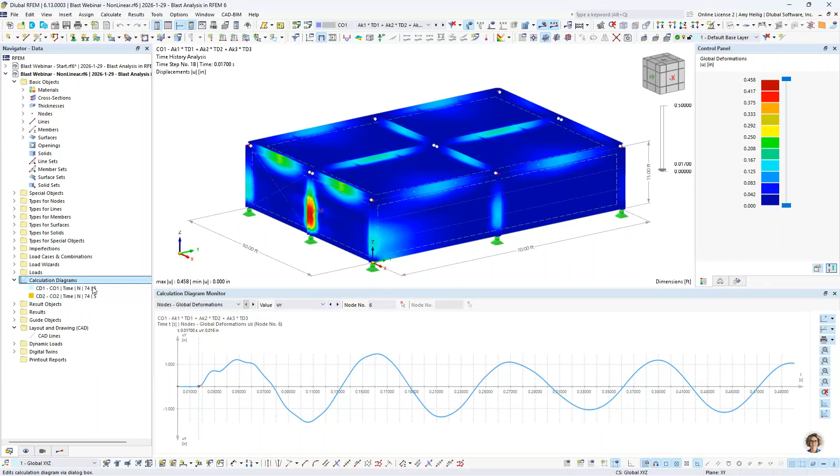The difference here, though, is let us revisit our calculation diagram. Remember, this is exactly what we just saw for our linear time history analysis. Well, I made a copy of this one using the copy tool in the lower left, to select my nonlinear time history analysis, that load combination number 2.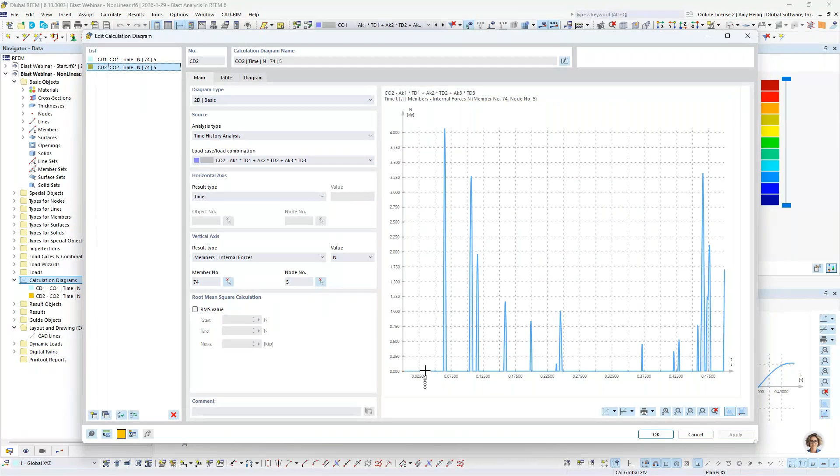And we can see that it's a pretty big difference. We are now able to account that this is a nonlinear tension-only member. Therefore, we should see only tension forces in the positive area of this diagram. The minute it sees compression, it's completely deactivated from the calculation. So certainly a significant difference here if we want to consider those nonlinearities.

If I zoom in here, it's also important for these nonlinear calculations that we get these more or less smooth curves. If you're seeing very jagged results in this diagram, that probably means you need to decrease your save time steps, and possibly even your time steps for your calculation further.

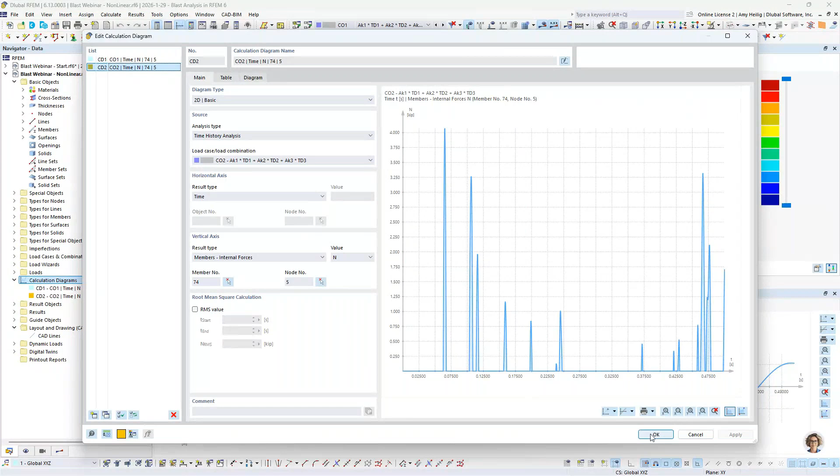Okay, so that will wrap up our full example today, going through both the linear time history analysis as well as the nonlinear. We'll go back to the PowerPoint here to wrap up today's presentation.